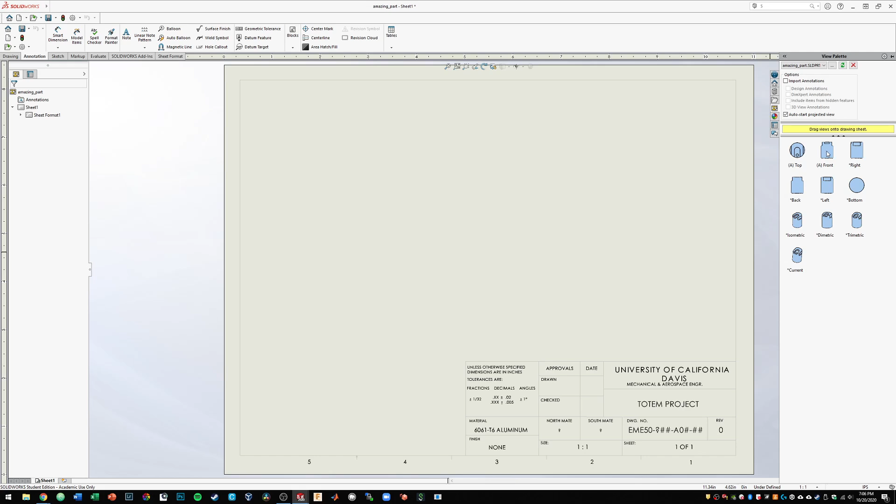First off, we can go ahead and make a drawing from our part. Go ahead and grab the template. Now we can start off with the front, the top, the bottom, and the side. And then we want our isometric views.

Looking over on our view palette, we have only one isometric view, and that's a view of the top part of the totem. So we also want a second isometric view of the bottom half. Let's go ahead and make that.

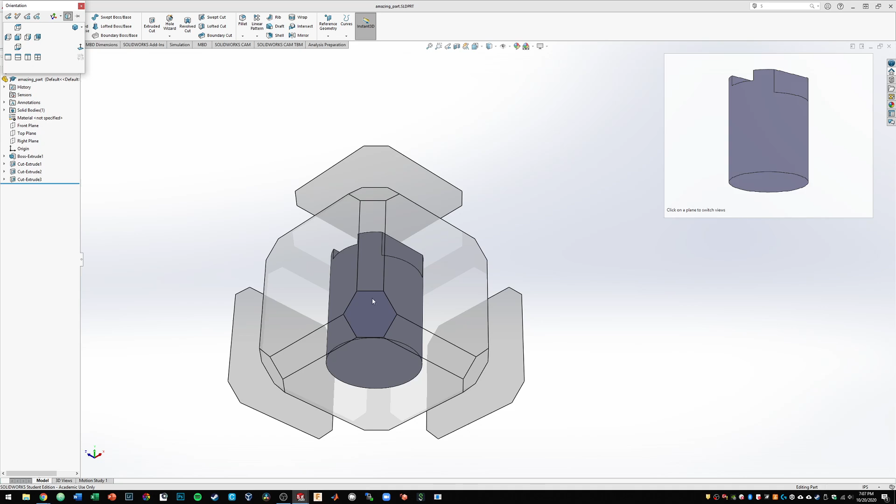So let's save our drawing here, and now let's go back to our part and create a second isometric view. We have our primary isometric view, and we want our secondary isometric view to look like this. To get that, we hit spacebar, and we can click anywhere over here.

If you don't have that, you have to go up to this toolbox and click the view selector, then click that isometric view. From here, hit spacebar once again to bring up the orientation box, and we can see new view, so we'll click new view.

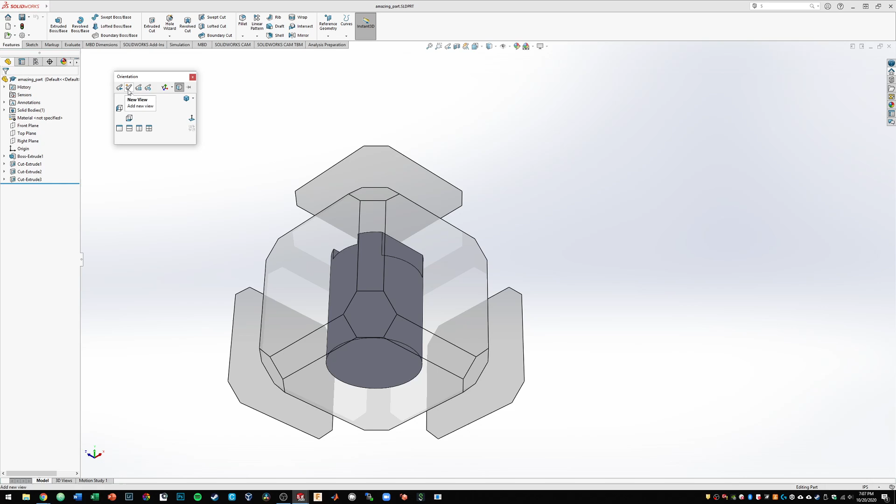We'll name this our south isometric view, and now we have a south iso view saved here. So we can go to our normal isometric view, hit spacebar, hit south isometric view, and it's as easy as that to add a new view.

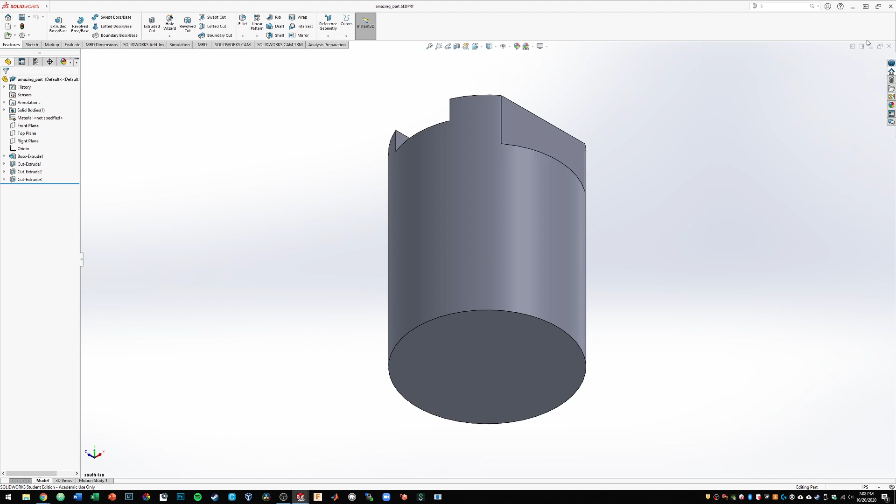So we can now save and minimize that for now, and open up our drawing. Here we can go back over to the view palette, and you'll see it's now out of date since we saved the part. So we can refresh that up here, and we can immediately see we have a south isometric view located right here that we can just drag straight in.

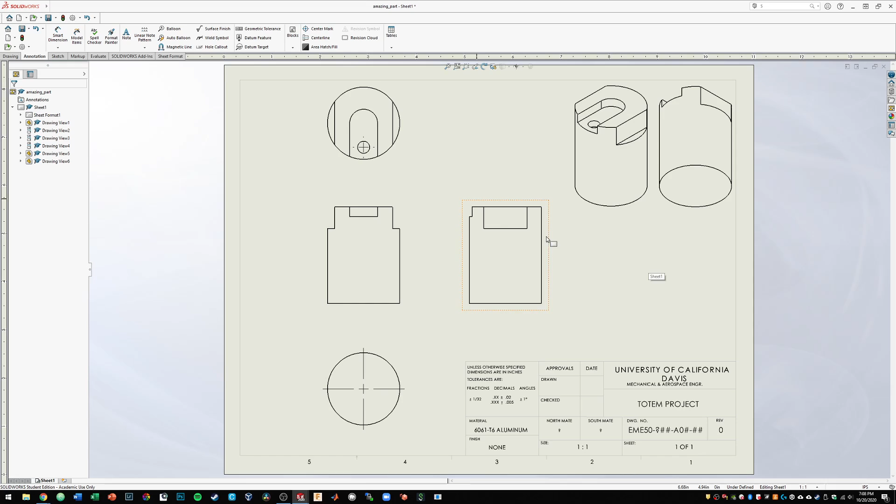We'll just lower that to try to line it up a little better. It doesn't have to be perfect. And there we have it. Now there's two views in there, which is what we want. So now we can go ahead and start to smart dimension everything here.

First of all, let's just get the overall height of the totem in at 2 inches. We'll get the 200 thousandths height to there, and the 450 thousandths there.

We can see that we don't have this hole showing, so if we hit this parent view, and we change the display style to show hidden lines, that'll change it for everything here.

However, we don't want it here on the south end, because once we start adding features to the south end, any sort of hidden lines will start to clutter things. So we can hit that view in particular and go back to the hidden lines removed. Now everything's looking pretty good there.

So now we can start adding some things. Let's add our center marks. We already have a center mark here that SOLIDWORKS already did for this hole. However, we also want it for the overall cylinder, and then we also want some marks for the center lines on our front and side view.

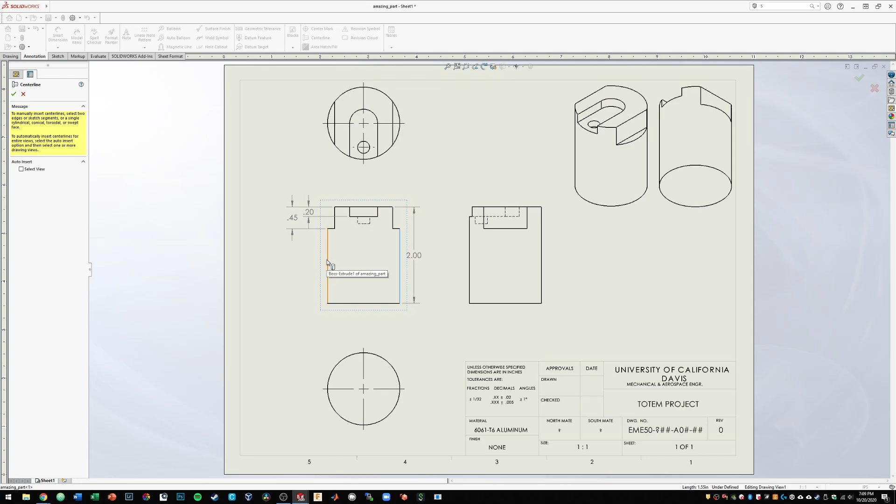When we hit center line and click here, we can see the center line actually doesn't go up all the way through, which we want it to do. So if you click that center line, you can drag those blue boxes up, and in this case I usually like making them a little shorter, something around like that.

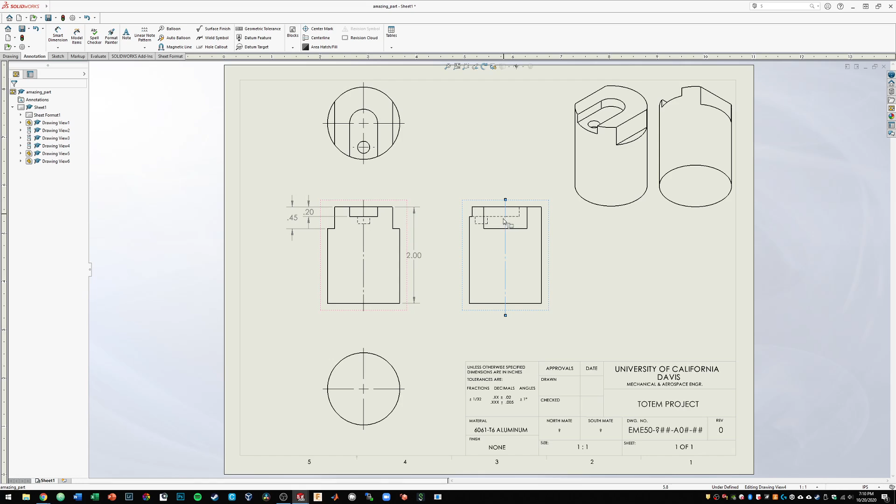We'll have to do the same to this side. In this case, looks like it's already set pretty good up there. We'll just adjust this a little bit. There we go.

Here we can actually see the center line sort of cuts into that a little bit. So actually what I will do is we can either raise it just a little bit so there's a bit of a gap there, so there's no confusion at all about what's actually going on.

Alright, so there we have hidden lines, it's going to sort of do it no matter what. Now we can start adding some more dimensions. So we need the dimensions from the center of that hole to the center of the part, and we also need the dimensions for the width of these slots.

Alright, so now we get that dimension in as well.

Now for this hole here, we can either smart dimension it like we've been doing, or we can use the hole callout, which is nice because that gets us the depth of the hole that we would otherwise have to dimension over here. So if we hit that hole callout, we can bring that out, and you can see we now have the diameter and the depth listed.

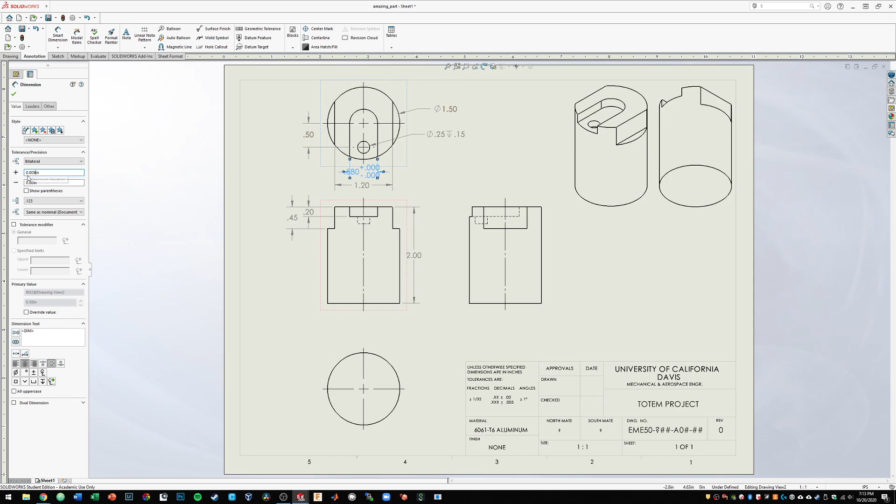And then since this is a slot, as we can see here, we want this to be at smallest the dimension that we drew it at, and we want to be able to allow it to be a little bit bigger if needed. So we will have a plus 5 thousandths minus 0 tolerance.

And since that's a little unclear there, we'll just drag that off to the side so it's nicely dimensioned just like that.

From here, just make sure you fill out your name, date, north and south mates, the drawing number, EME-50 in this case. We're in the fall of 2020 right now as recording this. A01234, and then your box number, and then make sure to increment the revision number by 1 every time you submit a new homework.

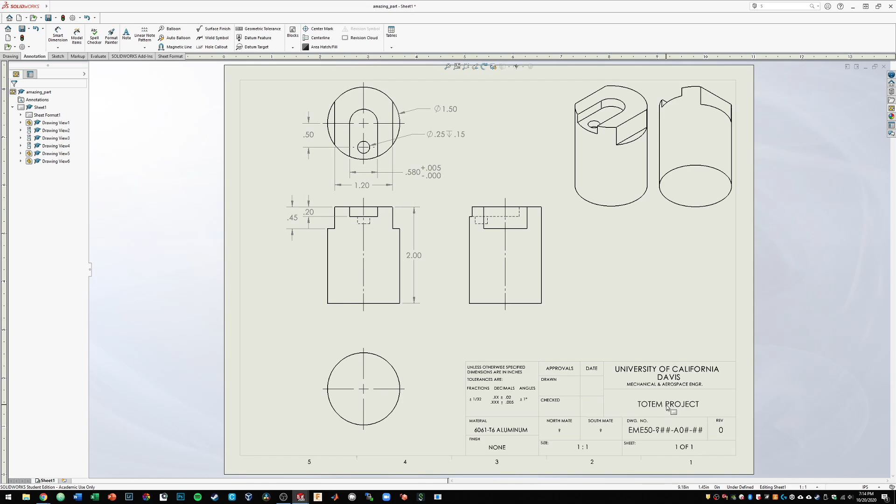And then you can throw in a creative name for your totem. In this case, my totem is the amazing part. So you can name it whatever you want there.